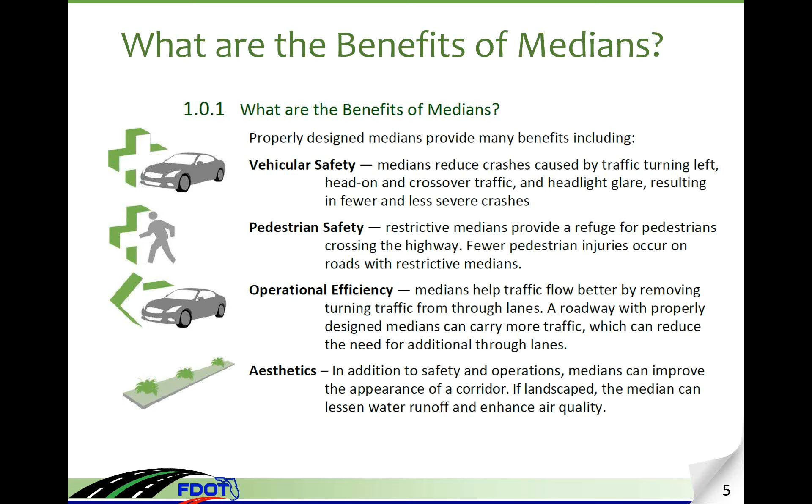This is an example of a directional median opening on US 98 in the Panhandle area of Florida. And as you can see, the long divisional island in this design can encourage movements to be made in a correct way. The term that is used in transportation engineering to describe a clear and simple direction is what we call positive guidance. And when we're designing any transportation facility, we need to use positive guidance to improve the efficiency and safety of the road.

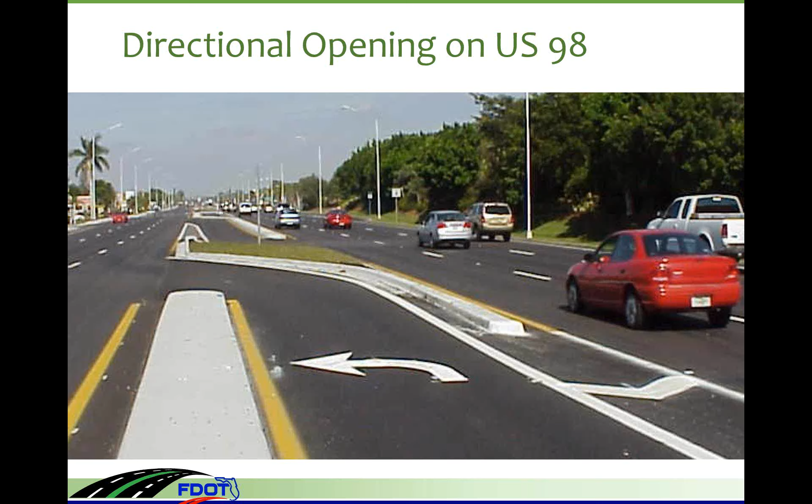And this is an example of a narrow directional median. As you can see, it's a narrow median with a 22-foot median. The narrow median itself may not be a positive guidance, but as you can see, the painted lines encourage drivers towards the correct use. But again, at times we may see illegal maneuvers, but we hope that these illegal maneuvers happen during the very low traffic.

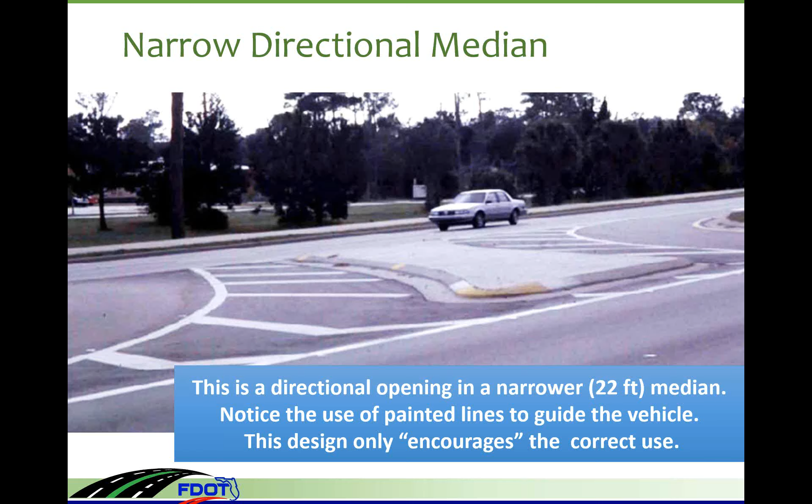Research has shown that restricted medians have a significant safety benefit. And in 1993, there was an evaluation on urban multi-lane facilities in Florida, and this research showed that the crash rates for roads with restrictive medians were 25% lower than those with two-way left turn lanes. And after 1993, there has been other research that really validates this research that was done by University of Florida, and other research has shown that restrictive medians do result in lower crash rates.

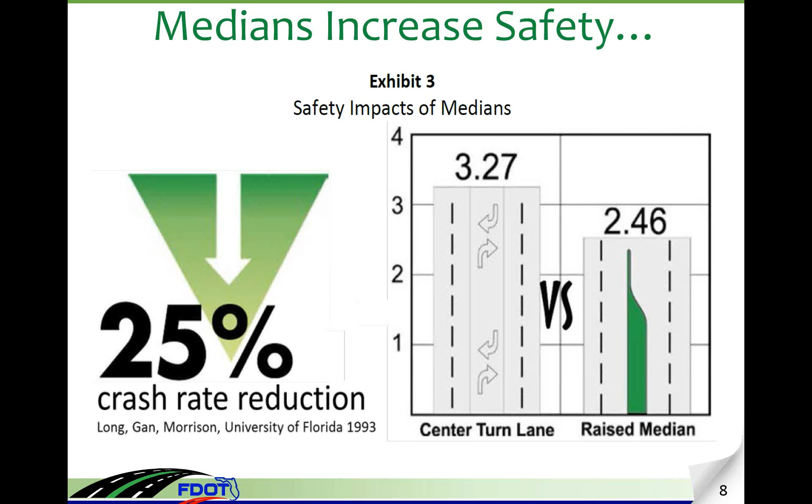So recently, the Florida Department of Transportation completed research on roadway corridors that were retrofitted with restrictive medians. One of the locations that we analyzed was Apalachee Parkway here in Tallahassee. And as you can see, a pedestrian in the middle of the road, that's not a good situation for the pedestrian. And so based on this research, the crash data shows a significant safety benefit on Apalachee Parkway after the median was constructed.

It's a little slow when I click.

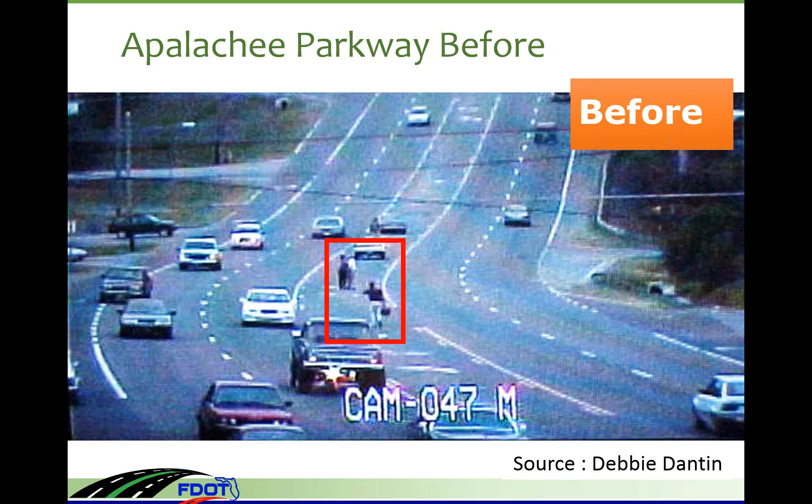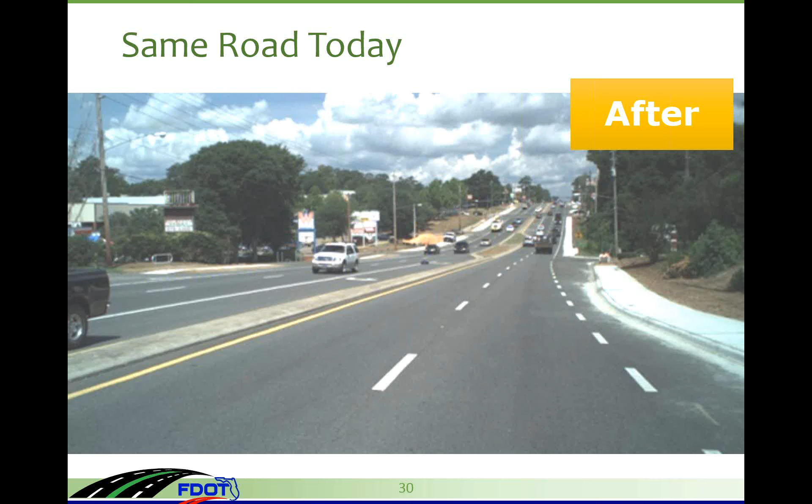And in addition to the study that we did on Apalachee Parkway, we looked at a number of other corridors, and we saw the impacts of having restrictive medians after the medians were constructed. And as you can see in this picture, before the median was constructed, we had 9 crashes. And the color of these dots, as you can see on the bottom, shows you the severity or the type of crash. So before the median was constructed, 9 crashes, and after the median was constructed, as you can see, significantly reduced the number of crashes.

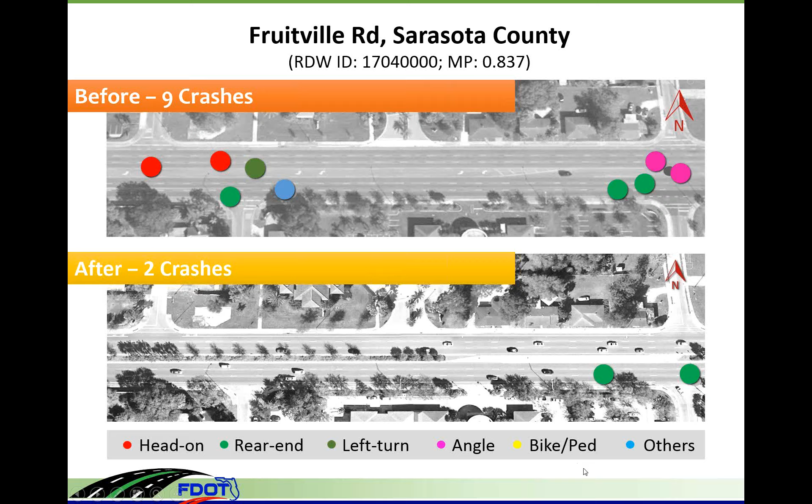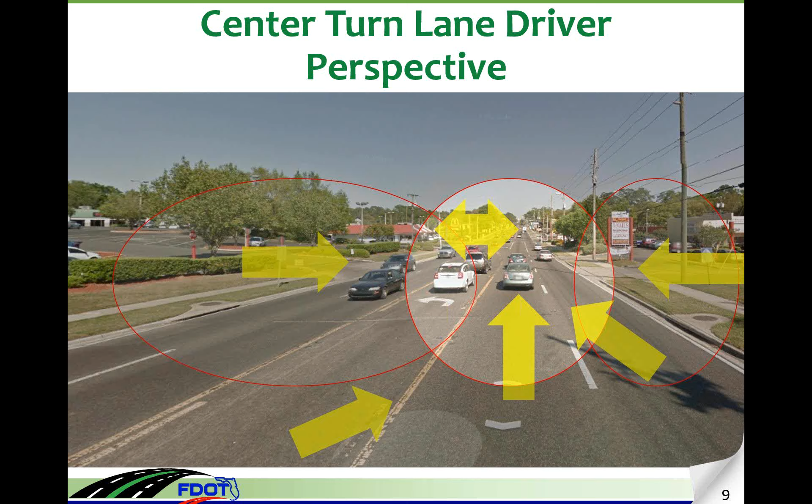As you can see, there are many areas where the driver is really overloaded with information from the surroundings. And this is why we want to minimize these information loads by really doing away with these center lanes and constructing raised medians. And this is after the median is put in, and as you can see, with the restrictive median there really aren't too many conflict areas, and the information load has been reduced significantly.

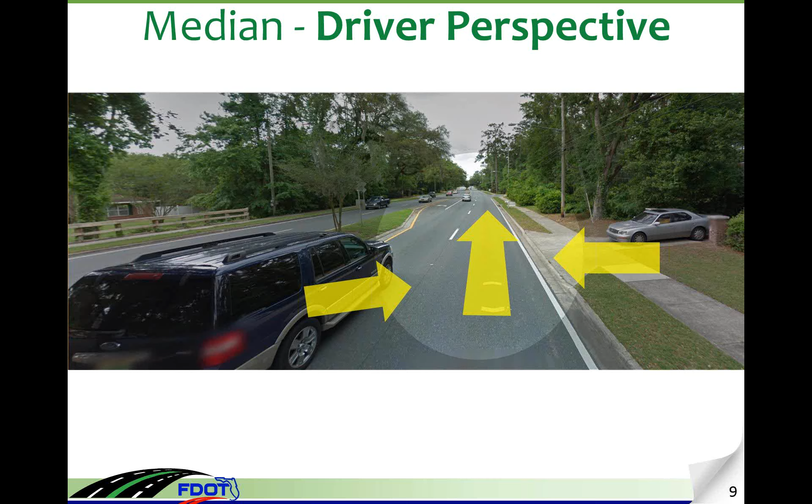One of the questions that we professionals get frequently is that we or FDOT are causing too many U-turns. And the fear is that U-turns are less safe and require the driver to put themselves in more danger by traveling a long distance. But a number of studies, including one done here at the University of South Florida, show under most urban conditions, making the right turn followed by a U-turn is much safer than making a direct left turn. And as you can see, the reduction in crash rates and also the reduction in fatality rates.

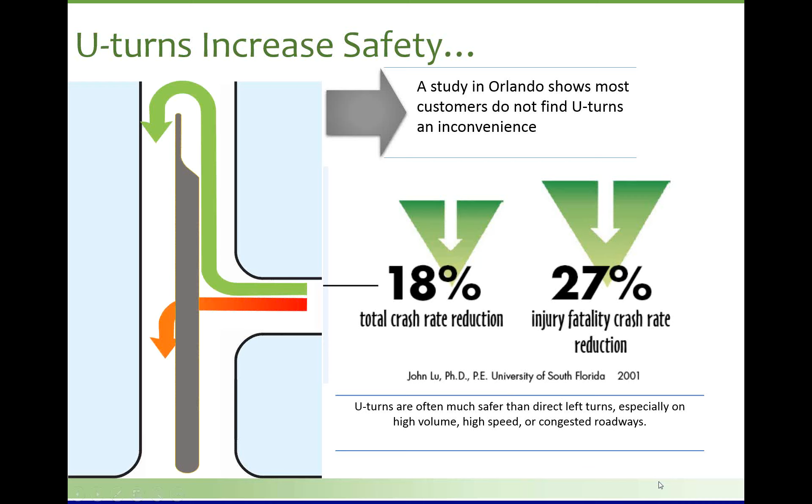I'm going to give this poll to Gary. I can do this poll. Okay. Gina, can you hear me? Yes, I can. Go ahead. Gary. Yeah. We have a poll here, and I'll be doing that poll.

Let me ask you, have you ever heard of the Highway Safety Manual? So I will be launching this and giving you an opportunity. Okay, right. So far I see some really good results here, since this is such an important tool. Okay, I'm going to close the poll right now, and then in a moment, you should be seeing the answers to this. Okay.

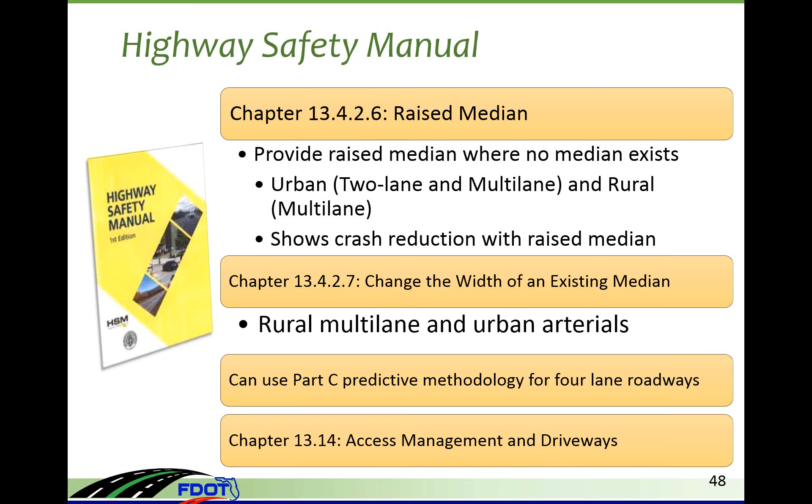So in this Highway Safety Manual, there is a chapter 13 that talks about raised medians and the width of the medians, and it shows us exactly how raised medians can reduce the number of crashes, and also the width of the median. And Part C of the HSM also has the predictive methodology. And again, in Chapter 13, Section 14, it shows us the benefits of access management and driveways.

So one of our FDOT districts used the Highway Safety Manual and applied the methodology to State Road 574, and they wanted to see the benefits of the restrictive median where the right-of-way costs were going to be close to 1.6 million over the alternative without the restrictive medians. They looked at the existing conditions: a 4-lane road about 1 mile long, ADT of 30,000, and they wanted to see the benefit of the restrictive median even though the right-of-way would cost close to 1.6 million.

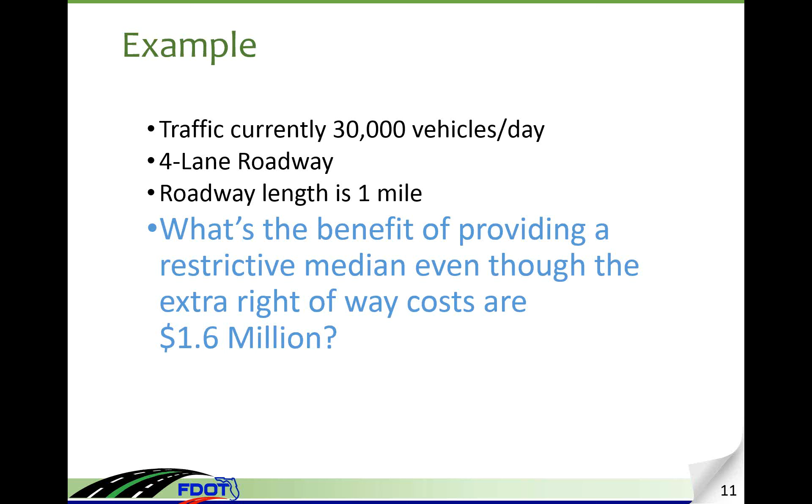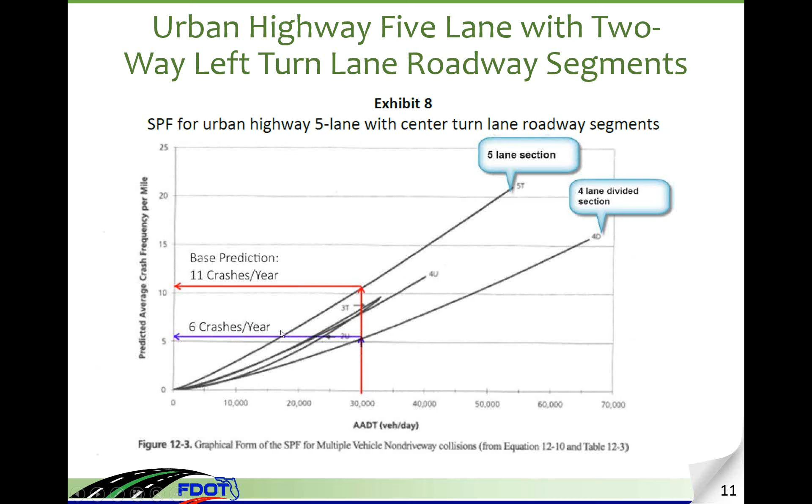So this exhibit came from the Highway Safety Manual, and it's called the Safety Performance Functions, and it shows, based on the number of lanes, 5-lane section and 4-lane section, and based on the 30,000 ADT, the 5-lane section has a higher number of crashes, 11, even just by looking at this without calculating anything. And if we look at the 4-lane with the raised median, 30,000 ADT, the number of crashes went from 11 to 6.

So in order to really justify any project, we have to do a benefit cost analysis. Without this, I don't think it can be justified. So in this example, they looked at the 4-lane crash cost, 2.2 million, and the 5-lane crash cost, 6.4 million. The difference between these two is 4.2 million. Then they also looked at the 4-lane right-of-way cost, 2.2, and the 5-lane right-of-way cost, 600,000. And the difference between these two is 1.6 million.

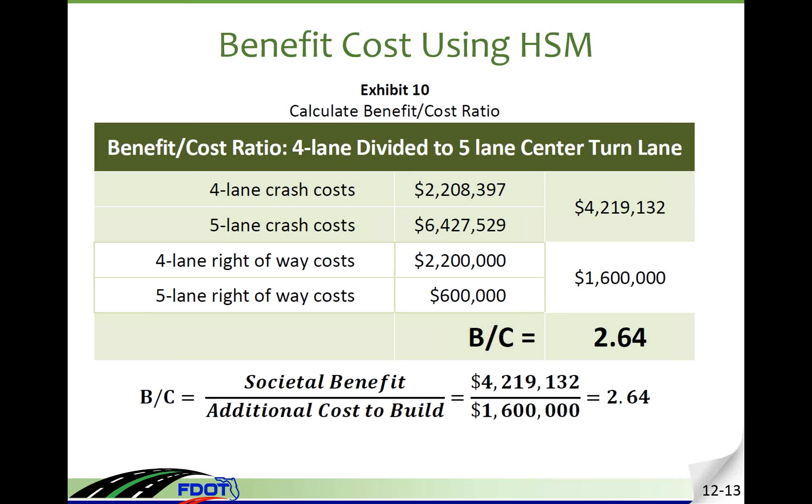So we divide the difference in crash cost by the difference in right-of-way cost, 2.64; that's the benefit cost ratio. And based on the Highway Safety Manual, the benefit cost ratio has to be over 1 in order to be justified. If you want more information on why or how this was calculated, you can go to the Highway Safety Manual, Chapter 12-13, which gives you much more information on how to calculate the benefit cost or why the benefit cost ratio is needed in order to justify an improvement.

Administrative Rule Chapter 14-97 establishes 7 access management classifications. Standards within the rule are for medians, median opening spacing, as well as driveway spacing. There are classes 1 through 7; class 1 is for freeways, but we're not showing it in this rule. Then it's from 2 to 7 for arterials, with 2 being the most strict access management class and 7 being the least strict access management class.

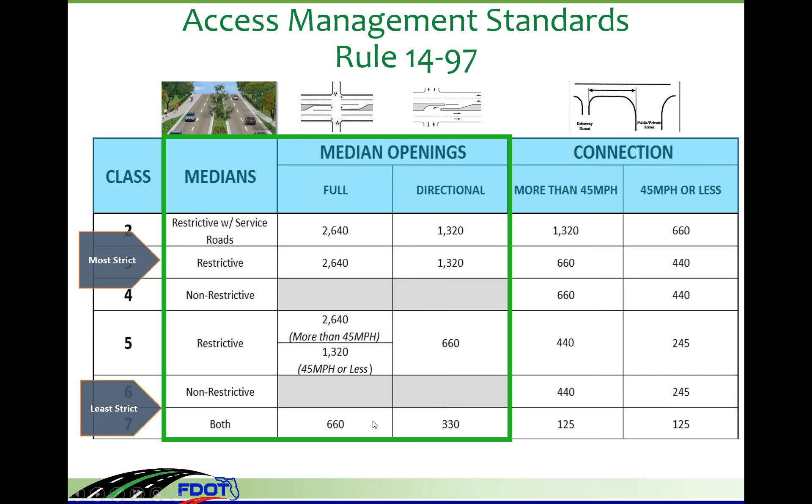And these classifications are further divided, as you can see, by speed limit: 45 miles and over, and less than 45 miles. And it gives you, based on the access management classification and median types, how far median openings, whether full or directional, have to be spaced from each other.

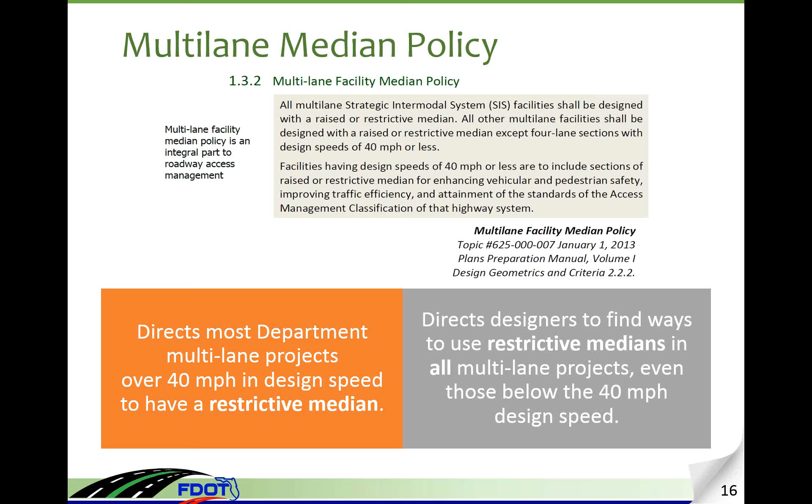And one of the most important policies ever established at Florida DOT was the multi-lane median policy, which is now part of the Plans Preparation Manual, PPM. This portion of the Plans Preparation Manual makes provision of the restrictive median on new multi-lane projects the rule rather than the exception.

So we know that the provision of a new median or the closing of an existing median opening can be very controversial, and for this reason we have a procedure that has set up an access management and median opening review team in each of our districts. These review teams have been in existence for over 10 years. Median opening decisions sometimes are just not black and white. Sometimes they can be handled at the local level.

Hey Gina, can I talk about this one? Go ahead. Yeah. The only reason I'm butting in is that I've been around long enough to know where some of the research came from, Georgia and Georgia Tech.

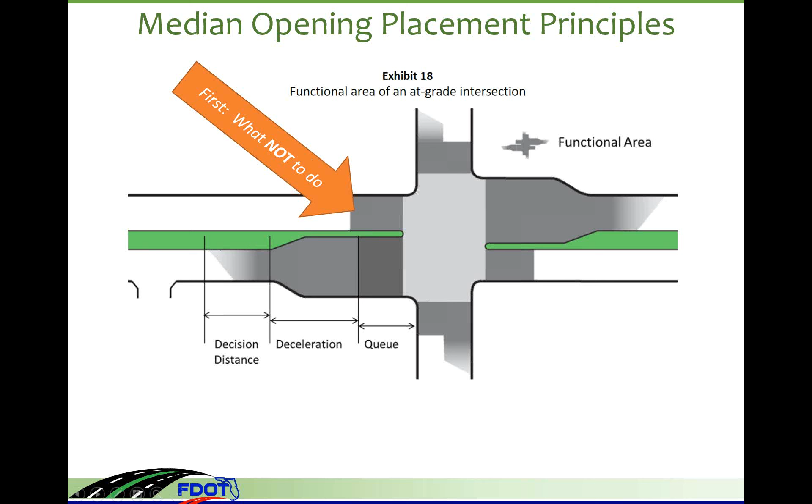Every intersection has a physical area, right here, as well as a functional area around it. This area is for the operation of either the signalized or unsignalized median opening, and this functional area should be respected. The first thing: don't put any more median openings in this area.

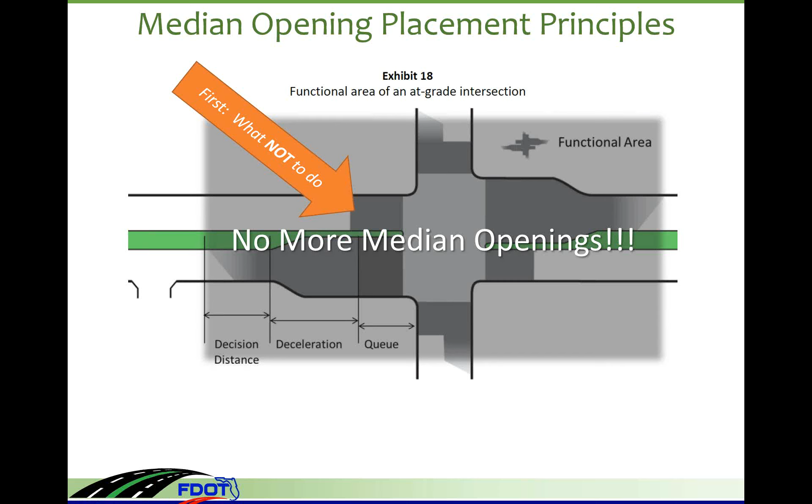You should not put median openings across left turn lanes. It's really important. It is a real confusing situation, and it is something that drivers do not expect. And I have noticed in my travels around the state that we have gotten rid of most of the ones that I knew about.

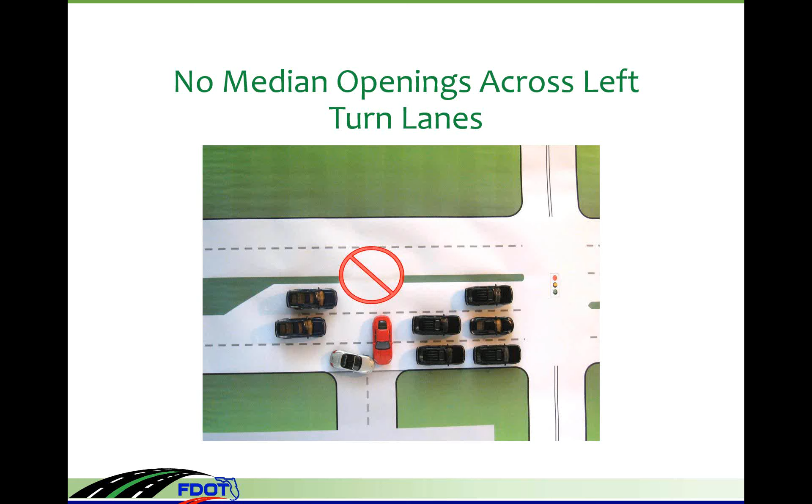Another not-do is to have a median opening within a turn lane. This design used to be more common, but we've gotten rid of most of these also.

Okay, so that's what you shouldn't do. This is an example of one that's since been corrected, where we put in a median opening through a dual left turn bay. As I said, it has been corrected. This is an old picture.

The other is to avoid median openings that cross exclusive right turn lanes. There is a problem with the Good Samaritan. As you can see, what happens here is that the left turning vehicle into a driveway located on a continuous right turn lane is let in by these Good Samaritans. Let's find those Good Samaritans. There they are. And the visibility is such that they are blindsided by the free-flowing vehicle in this long, possibly too long, exclusive right turn lane.

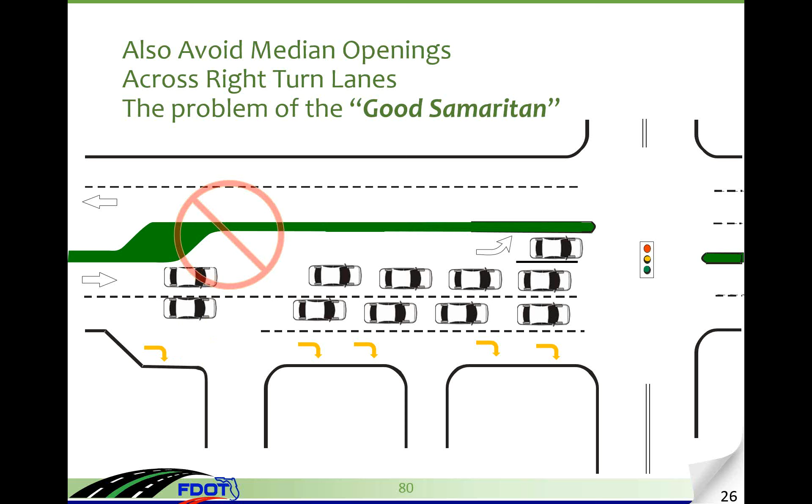I have seen a number of ways of dealing with this around the state of Florida. Sometimes they work with the actual turn lane, either shortening it or marking it in such a way for people to know that this is a special area. And along State Road 436 in the Orlando area, they have closed a number of median openings in this situation. So don't do that. Do that instead.

We've discussed a number of things not to do when placing a median opening, but we're going to get into more specific guidance right now to help you determine the appropriate location of median openings. You can probably break it down into three criteria that should be looked at in making median opening location decisions, and they're very similar to the decisions you need to make for an intersection.

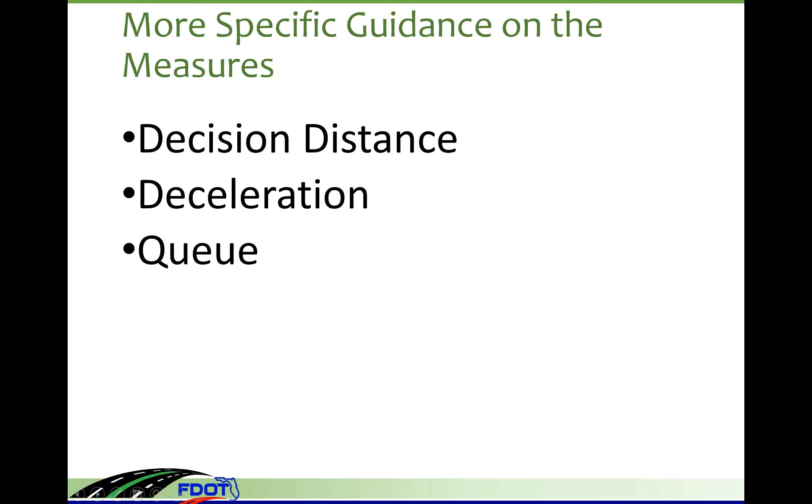We're going to approach this as a driver who is approaching an intersection. Okay. First, you need space and time for the driver to figure out what they're going to do. Are they going to stop? Are they going to get into a turn lane? Or are they going to go straight?

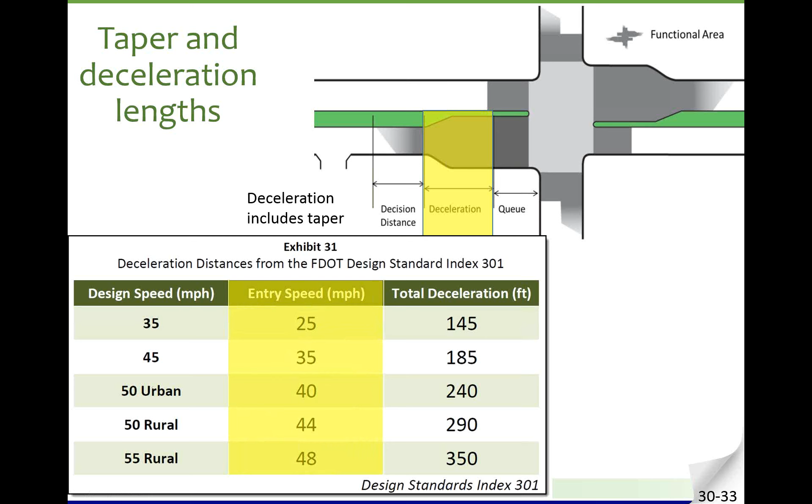Okay, so the entry speeds are actually an important feature that you should be aware of in the standard index. The reason entry speeds are important is because of something called speed differential, or difference between speeds, to make it more plain English.

In the situation that we try to design for in Florida, if you're designing for 45 miles an hour, you would expect that left turn driver to enter the turn lane at 35 miles an hour. 45 minus 35 equals 10. This is a 10 mile an hour speed differential, and it's usually considered safe by the profession.

Now, what happens is if you've designed it for a certain queue, and we'll discuss queue in a few moments, and there are more cars than you expected, you're in this situation where you're going 45 miles an hour, and you go, oh God, there's not much space left, and I now have to slow down to 15 miles an hour to get in here. Or even worse, you're slowing down to 15 and then stopping, and you're not even in the turn lane. In this case, this is a 30 mile per hour speed differential, 45 minus 15.

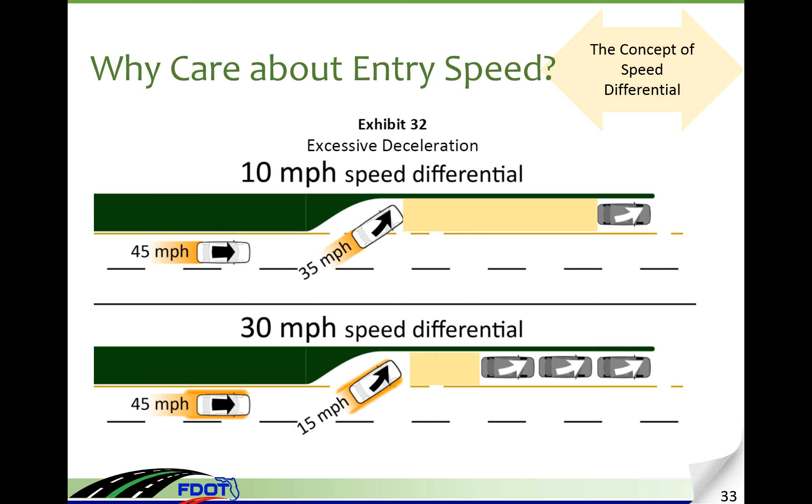Okay, so that's all based on the fact that you got different realistic, or different practical, deceleration distances. And that is why the queue is so important.

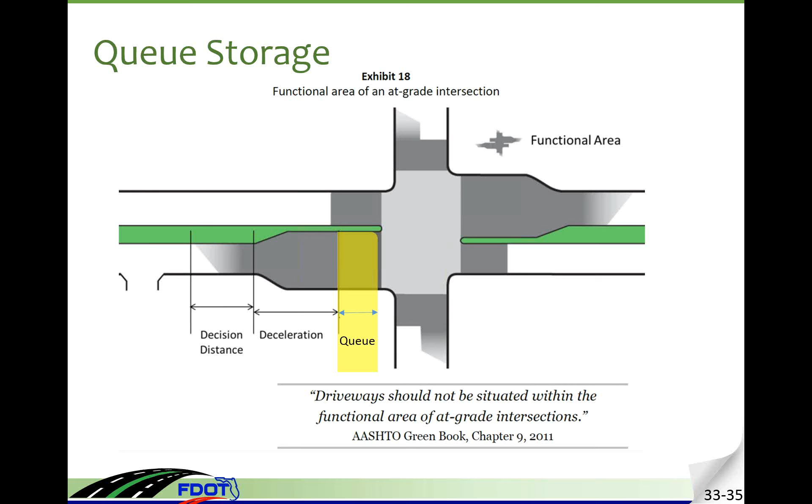But unfortunately, the queue is highly variable, and it's kind of guesswork in some ways. The necessity to store vehicles and trying to get that right is important for the operations of the intersection.

The basic building block of queue length is the typical passenger vehicle. This is a standard passenger vehicle. The space needed for a car in a queue is around 25 feet, which is made up of the 19 feet of the typical vehicle, with 3 feet on either side, or 6 feet being the buffer.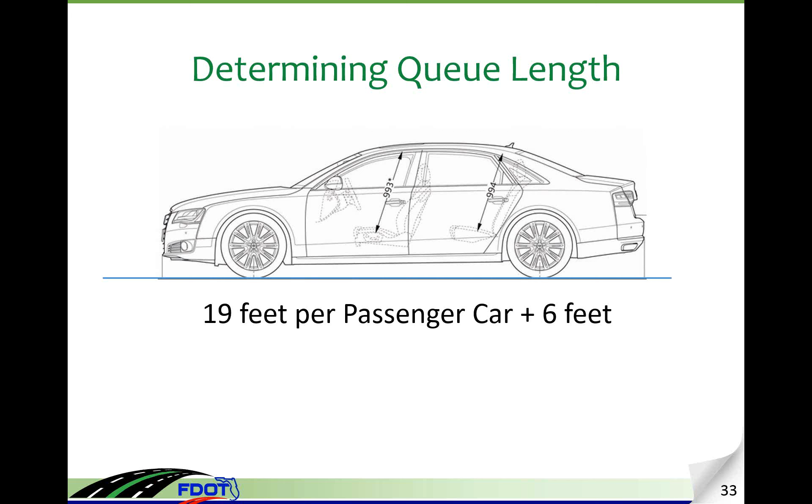Now, how do you figure out queues? Well, the best way, we say, is through a study. But knowing, again, studies are variable. They're based on assumptions of the future that could change.

Queue lengths tend to vary during the same day, the same hour, and a lot of times they just seem random.

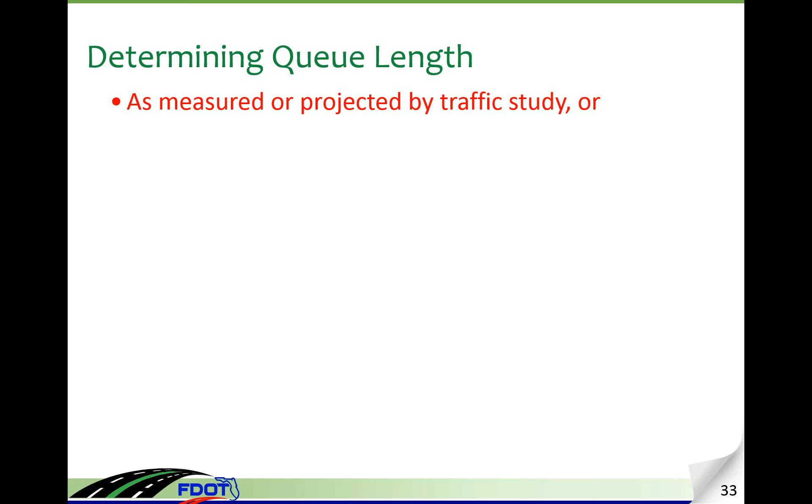If there is an urban area at a typical unsignalized median opening, there should be a minimum of 100 feet or 4 vehicles. Remember that we said we're using 25 feet as the typical vehicle length. In rural areas or other areas where you expect low volumes or very low volumes, you can use a 50-foot or 2-vehicle queue. Also remember that when you're in a rural area, it doesn't mean it's necessarily going to be low traffic. We don't know in the future what's going to happen. If at all possible, try to be generous with the design of queue storage.

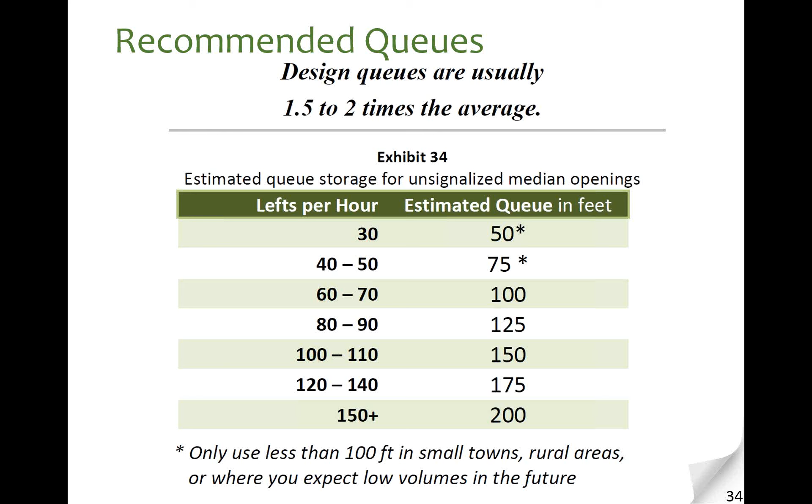Based on random arrivals at the unsignalized median openings, we have used a formula to come up with an estimate that takes the left turns per hour expected, and provided this table as a simplified method for determining the queue length. This is all based on the 25 feet. There is further guidance in the handbook for over 10% trucks; this is for up to 10% truck vehicles.

We spent very little time on the official spacing of median openings as shown in the access management standards, and there's a reason. We didn't want our professionals to have to just always answer questions from the public by saying, well, that doesn't meet the standards. We really want our professionals to know where these standards came from and why they're important.

So it's one of the major reasons we put out the median handbook. We feel that the numbers in the standards are a good guide. They give you good flexibility, but you really do need to be thinking about deceleration, queue storage, and the turning radii. I'll show you how this fits together.

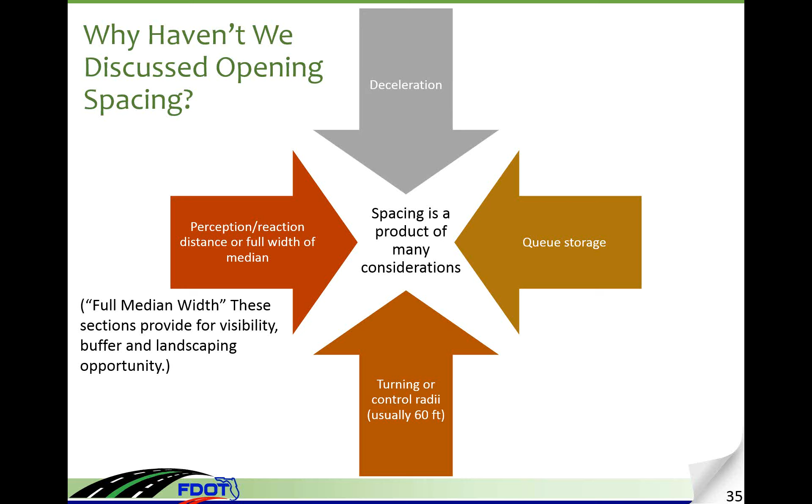Let's take a look at this very tight urban example, two intersections. In this instance there is a full median opening at both directions, we'll call it east and west, and they share a 50-foot taper. There is no portion of this median that is truly, let's say, 22 feet wide. I always like to use 45 miles an hour as my test case; this makes me not have to memorize many things.

185 feet is the deceleration for 45 miles an hour, and in this case, because we don't have any full median width, they're sharing this 50 feet right there. We've given 100 feet on both ends as a minimum, and we're adding 60 feet of turning radius. If you went from beginning to end, this would be your median opening spacing. This is the way we would like people to think about median opening spacing, not just some standard out of a rule book. We want people to think about this using traffic engineering principles. So this is 640 feet here.

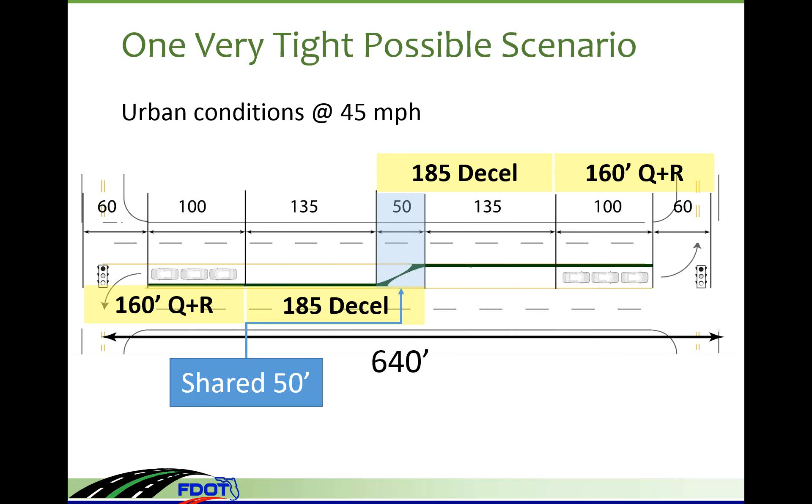That is pretty tight. As a person my age remembers, when we used to build multi-lane roads, we would build openings every 660 feet. So it's one of the reasons we came up with that.

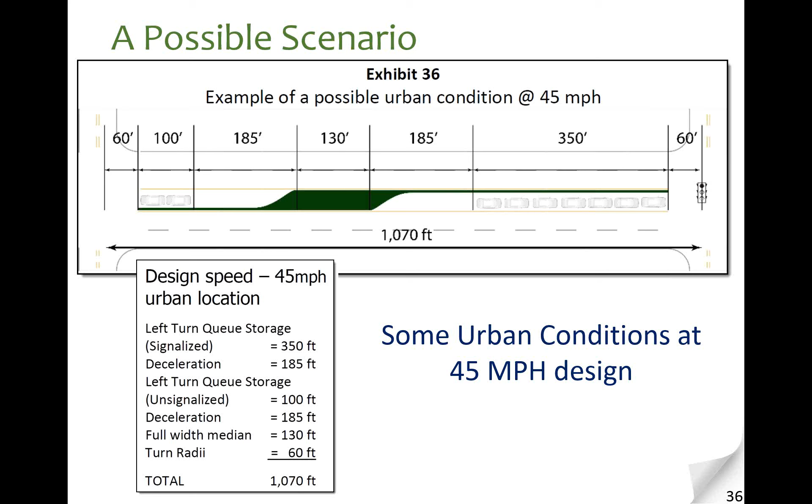This is, I guess, a more realistic, non-standard example that shows some distance here. Working our way from the inside out: about 130 feet of full median width to allow for better visibility, 185 feet of deceleration, and for the signalized intersection here, 350 feet of queue storage, which is not uncommon for a high-use left turn lane under new construction. This intersection is not signalized, so we're using the minimum of 100 feet here and 185 feet for deceleration also. If you added all these numbers together, it's a bit over 1,000 feet. Again, even 660 feet, which used to be something we'd cookie-cutter up, doesn't meet that.

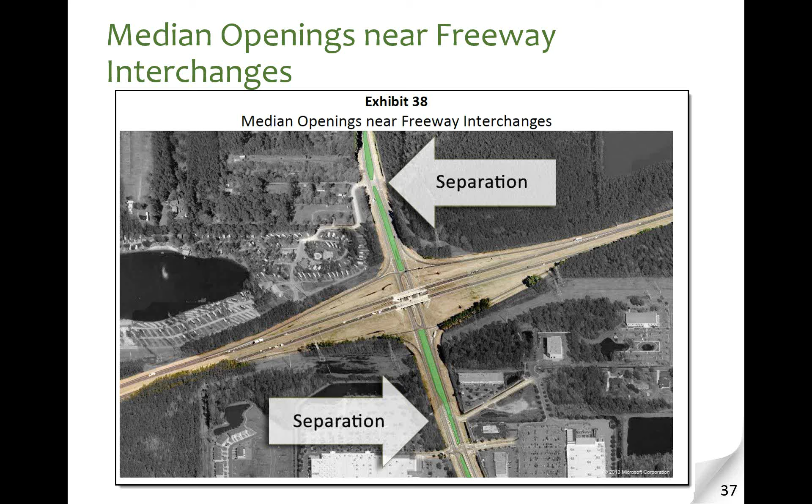Median openings near freeway interchanges are extremely important, and we should be well aware of this when we improve freeways and when we allow development along these areas close to freeways on the at-grade arterials. It's critical that median openings be given significant separation from the on and off ramps of the freeway interchange.

This is an example I know fairly well because I used to live on Lee Road off of I-4 in the Orlando area, and it is an intersection that is failing frequently. Notice that our directional median opening spacing for Lee Road would be 1,320 feet, and what we have here is only 220 feet. This is a signalized intersection. Notice a driveway only 40 feet from the off-ramp of I-4. For this reason, heavy congestion and backups are common throughout the day here.

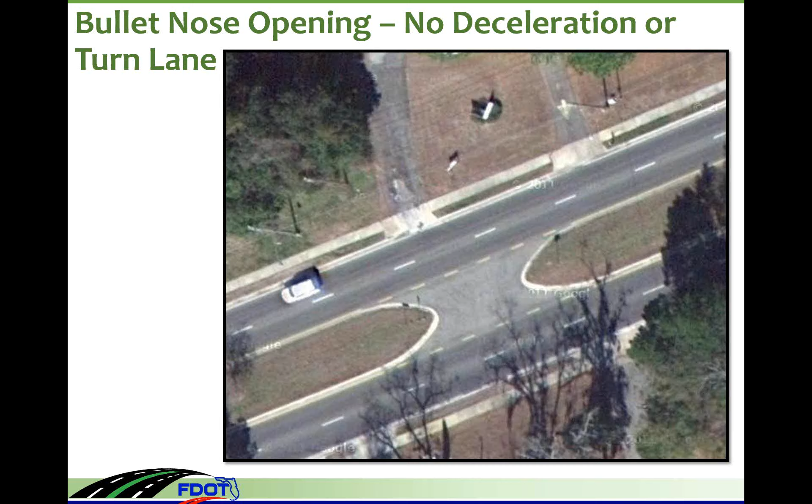This is a typical example of what used to be a rural 4-lane roadway, which is now quite urbanized, which happens to a lot of what was once rural multi-lane. You'll see that there are some turn lanes, built probably as part of the permitting process for the businesses alongside. In the center of the roadway, right here, you will see that there is still a bullet nose in existence, though I believe it's changed because of development. The reason this should be avoided is seen by how many vehicles you see on this road. Look how closely people are following.

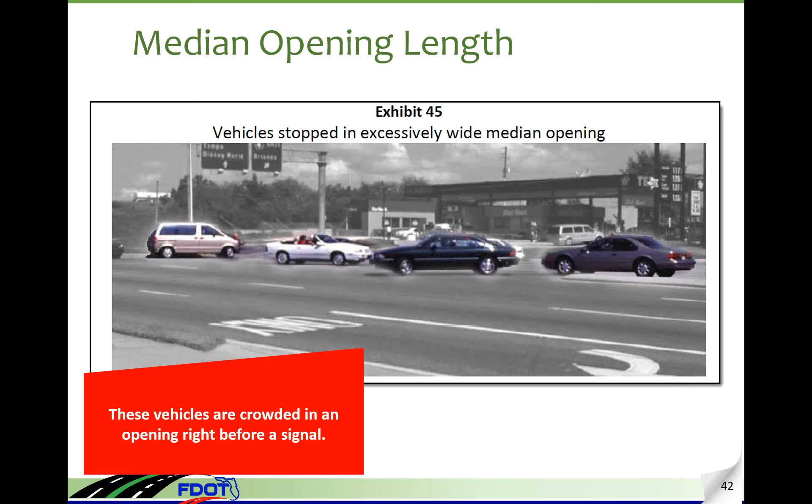They really need more space for people to slow down and get into an exclusive turn lane in order not to cause rear-end collisions. Another important feature is the length of median openings. Sometimes they allow way too many cars to get in there. You can see here that vehicles are stacked in this opening, and the driving task is made even more difficult by the fact that some vehicles are blocking the vision of others.

At this point, I would also like to stop for questions and ask Andrew or anybody else who has been handling questions.

I'm not seeing any questions, Gary. Okay. This is obviously the advanced class, and I'm looking at the names. A number of these people I know have been active in previous versions of the median handbook. Okay.

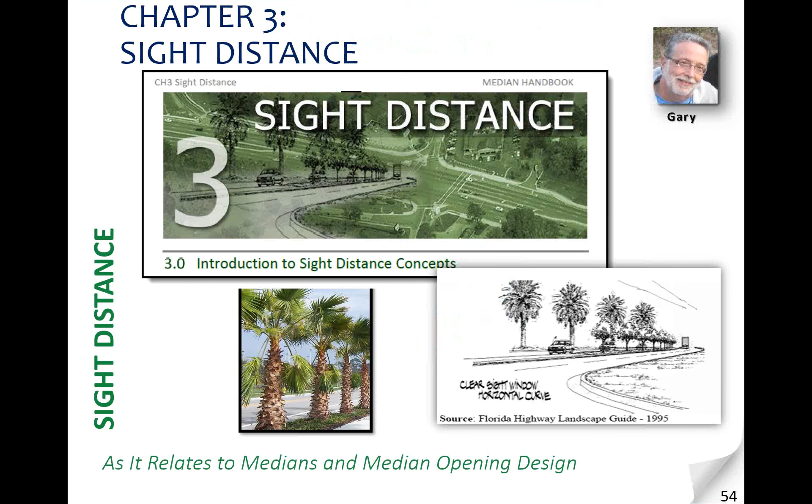Then I'll move on to sight distance here. It's an important consideration in the placement of median openings. The most important type of sight distance used is called intersection sight distance, and that's the sight distance for vehicles to be able to make intelligent decisions to maneuver with the typical P vehicle.

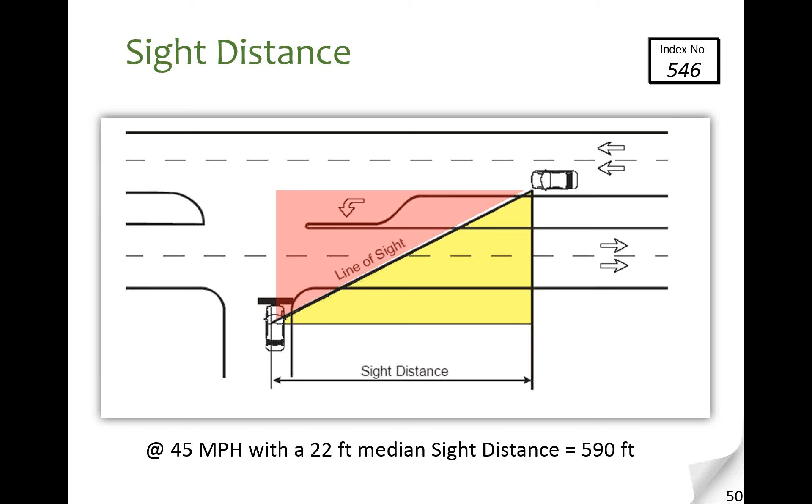This shows the required sight distance for a 22-foot wide median with a design speed of 45 miles an hour. This is in the standard index, and it calls for 590 feet in this situation. You can see there are different situations. This is a more realistic view from an aerial standpoint.

However, I do need to point out that this car here really needs to be further back to the stop line, and that was just some problem with the animation as we switched to a different format.

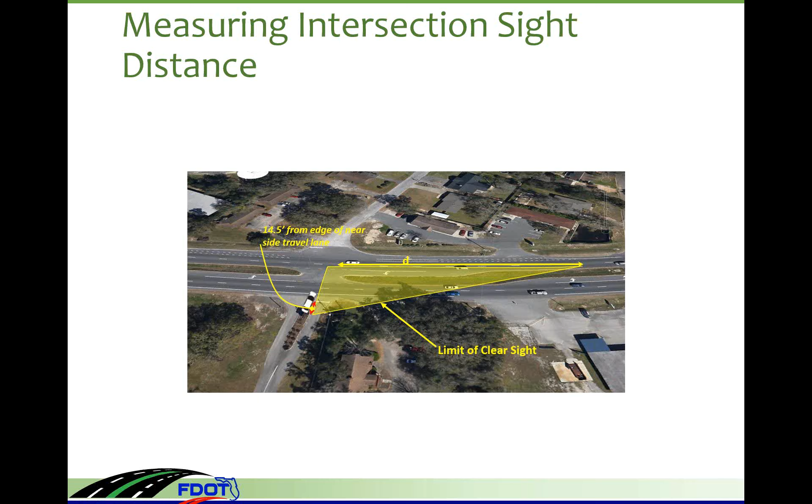This is just an example of the standard index containing many required distances for different situations, such as different design speeds, median types, and vehicle types. This slide only shows the standards for the typical passenger vehicle, also known as the P vehicle, with the 22-foot median. This is probably the most common in the urbanized area of Florida.

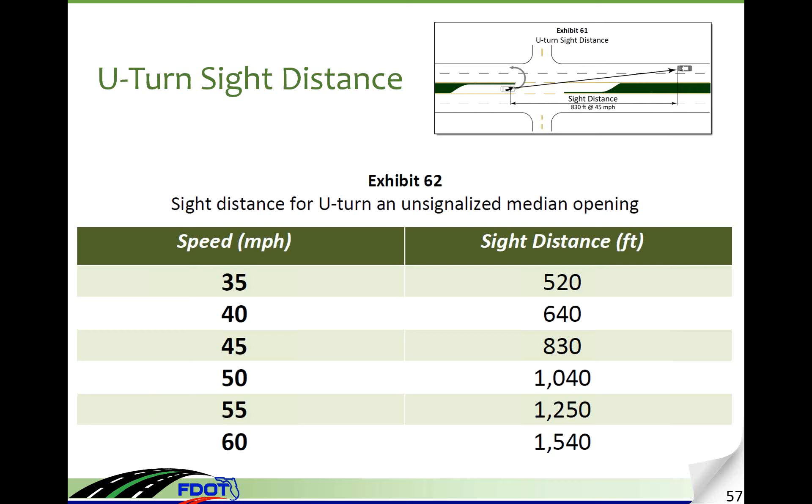One special feature in this handbook is a U-turn sight distance. We might be the only state that has ever done this sort of work. There is no known national guidance on this, and people from all over the country have asked us to see this. We used the typical AASHTO standards that were around in 1996, which makes them a little bit more conservative than what they would be today if we recalculated.

Another important feature to consider in terms of sight distance is the offset of the median opening. Here on the left, you'll see negative offset, which in this case prevents drivers from seeing oncoming traffic in the through lanes. Now, positive offset, which does require more design and right-of-way, gives you a clear view of the cars approaching you. The use of a positive offset is a very good design feature.

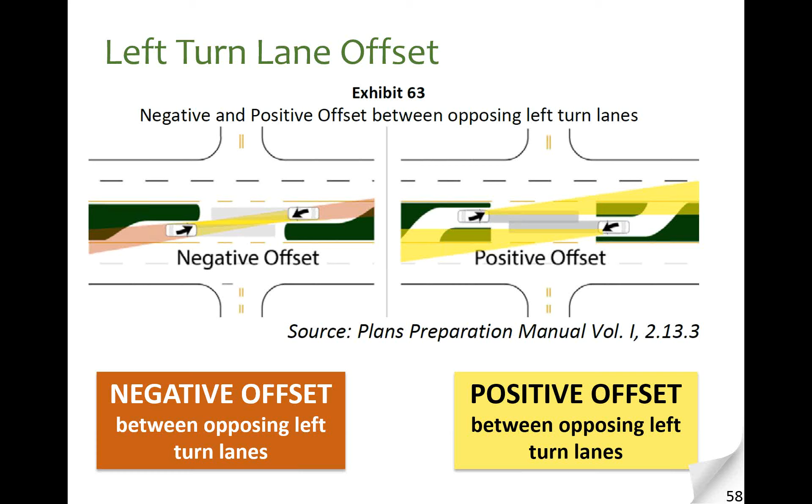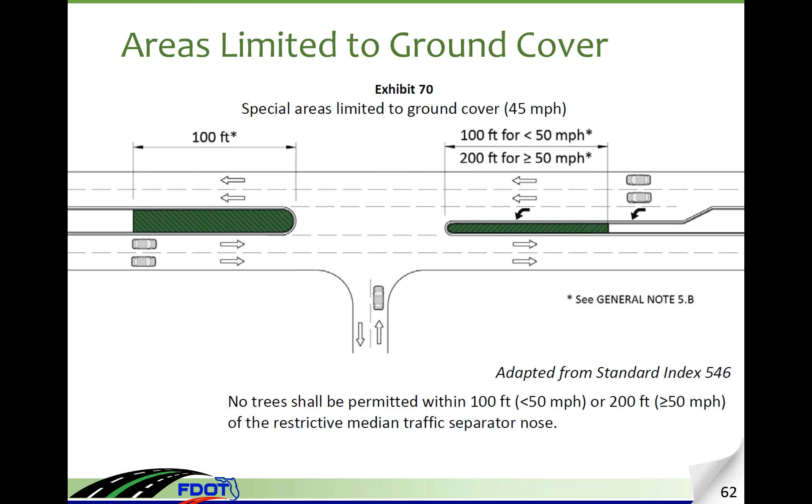Landscaping has been a major factor in the development of sight distance standards here in Florida. Here you will see something from the standard index that shows that somewhere between 100 and 200 feet from the nose of a median opening, depending on conditions, there should only be ground cover that will not block vision.

But going further, Florida DOT, and I think again we're the only state that I know of that has done this, has standards for the spacing of trees on our medians. Please note that there are two sets of standards here, one for up to 11 inches in diameter, the other from over 11 inches up to 18 inches in diameter. There is a reason for this: Florida's state tree, the sabal palm, fits into that category.

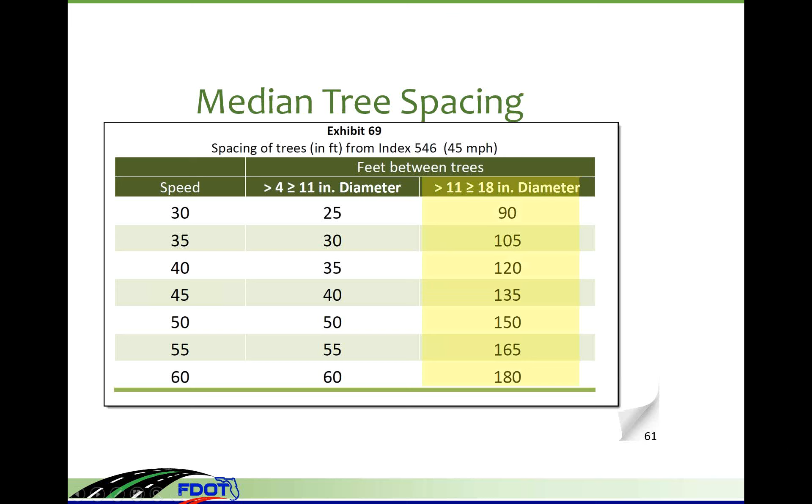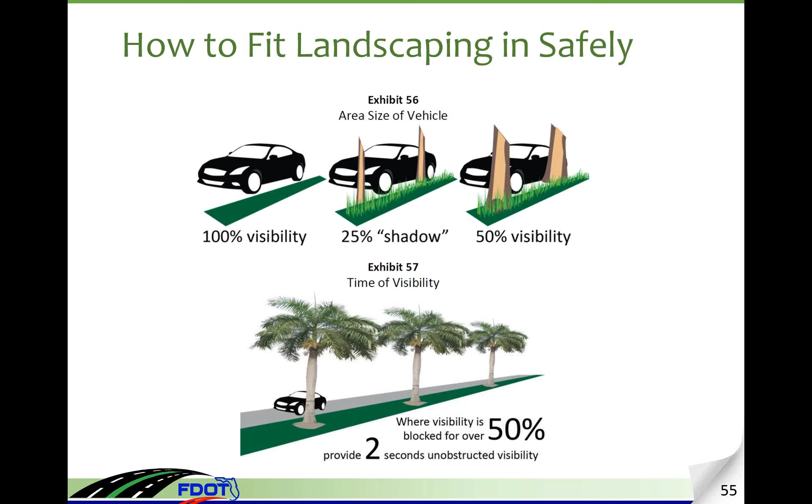So the problem with the sabal palm was that it grows bigger, and many places would not allow it since it would go against some principles of sight distance, which say you should never get below 50% visibility of an oncoming car. So a decision was made here in Florida that if visibility would be blocked over 50%, we would need to provide 2 seconds of unobstructed visibility. This puts it all together, and this is an example of the tree spacing you'd need to have. Under 45 miles per hour, you need 360 feet of stopping sight distance, which is what you'd want to keep clear of trees.

But the spacing, if it was a crepe myrtle, would be 40 feet. However, if you were trying to use a sabal palm, you would need to have 135 feet. This is a big difference, and now you know why — this provides the 2 seconds. Okay, questions? Any questions? All right, I'll move on.

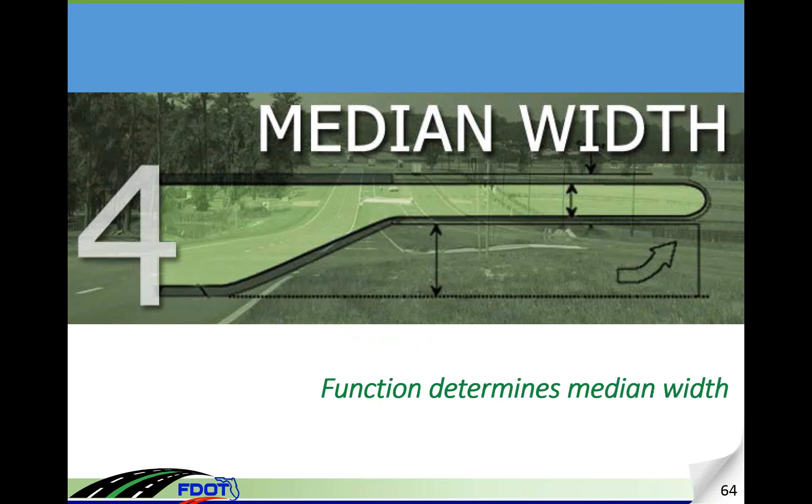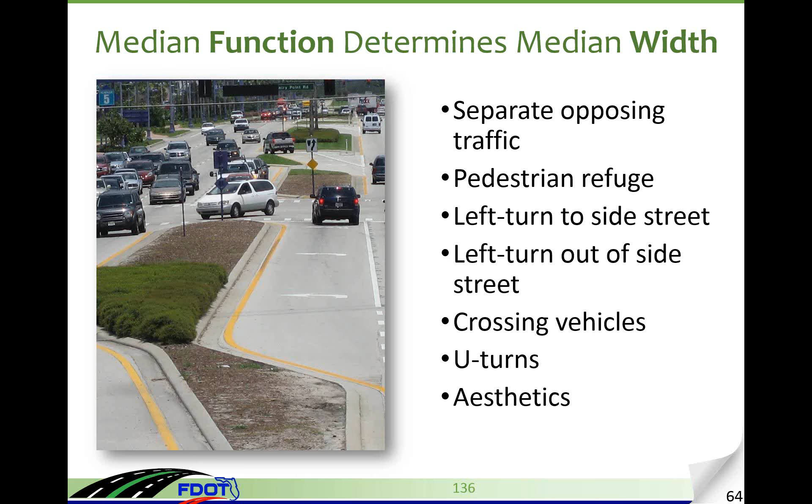Let's talk about median width. The most important principle we want to go over today regarding median width is that it is the function of the median that will determine its width. Medians do many things: they can simply separate traffic, they can be designed to help people get across the street, and more importantly these days, to provide a good place for U-turns. So we're going to talk about that a little bit.

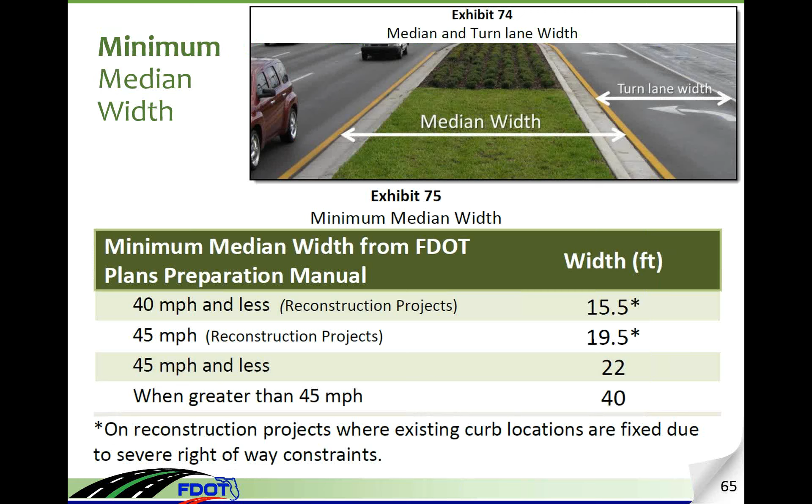The Plans Preparation Manual contains these minimums for reconstruction projects that are low speed to those greater than 45 miles per hour. We use the AASHTO Green Book templates to come up with these recommended median widths. For 4-lane highways, 30 feet would be enough for a typical passenger vehicle to make a comfortable U-turn without infringing on the side. You'll notice that for 6-lane highways, the medians can even be more narrow, because the 6-lane roadway, with 3 lanes in one direction, gives much greater space for the typical passenger vehicle to make the U-turn.

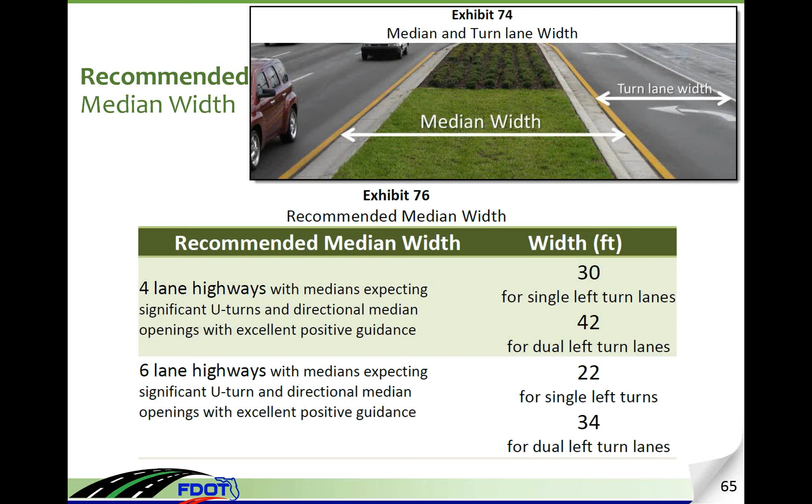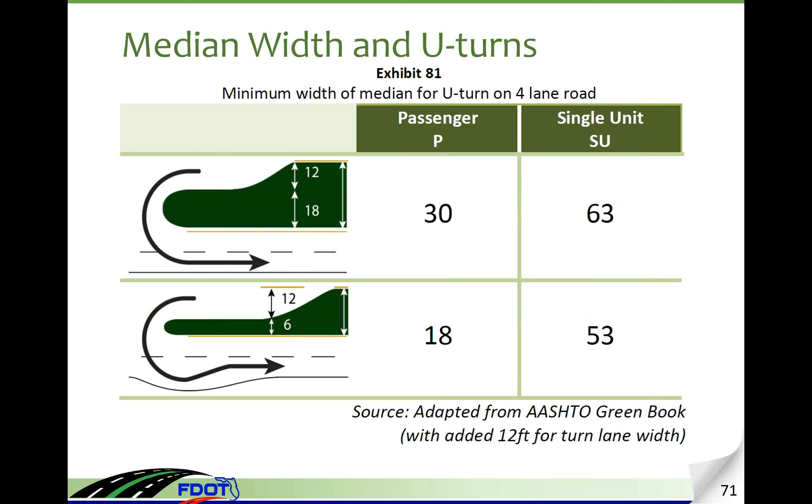That leads us to the U-turns. We know we're doing the right job when we've created more U-turns, but you do have to consider them. We touched on the median width. This shows you visually where we came up with those numbers. And what we do is we put in what's necessary, and we've used the AASHTO turning templates.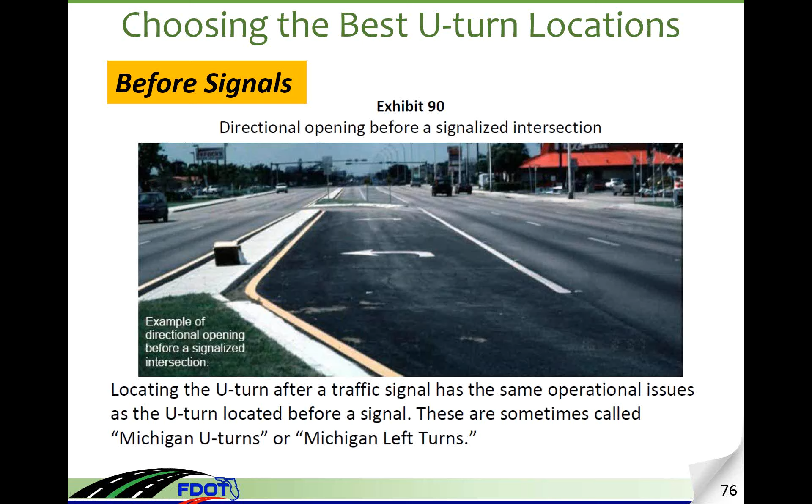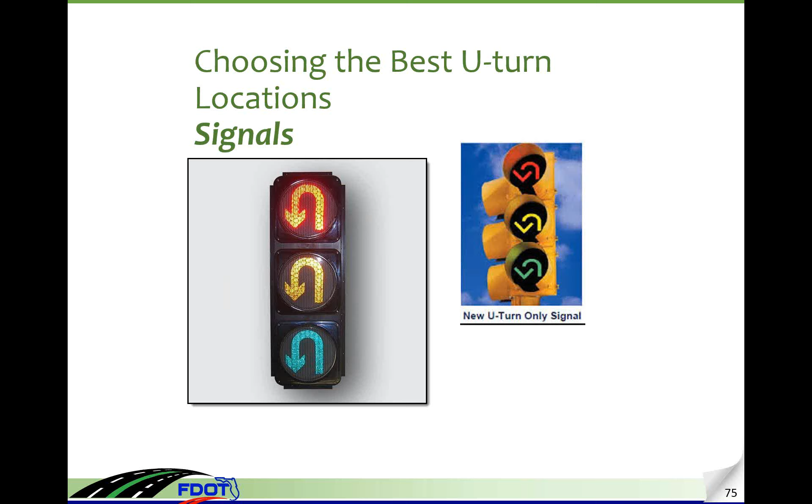It was news to me, but there seem to now be turn signals for U-turns only for places where they're designed. This was news to me, but I got to say, it wasn't that long ago for me to see my first roundabout, so I'm always learning things. With this, I will turn it over to Gina.

Thank you, Gary. Okay, hold on, Gina. Wait a second. I hope you have the controls. Okay, we'll try it. Yeah. Yes, it says you do. All right. Thank you, Gary. All right.

All of us have the new release of the Median Handbook, and we all know now Chapter 6 in the Median Handbook. It's about roundabouts, and it's a new chapter in this Median Handbook. So with this chapter, we wanted to provide some guidance to help us determine whether a roundabout is an appropriate access management tool for a specific application. And also we wanted this guidance to tell us how to best place these median openings and driveways near the roundabouts.

We haven't had guidance when it comes to roundabouts. We didn't have any guidance where to place the median openings or where to place the driveways, but we do have guidance when it comes to intersections. We do have rules, we do have guidance. We know, by following the guidance in the vicinity of intersections, where to put the median openings or the driveways. So we added this chapter to give us at least some guidance to better understand placement of these median openings or driveways.

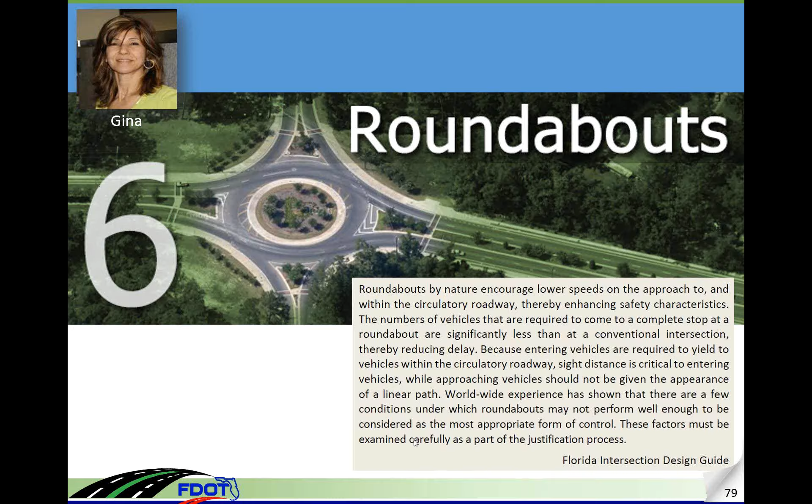Roundabouts are ideal for providing U-turn opportunities, especially if the roundabouts are designed in series, which can really help create an integrated system of moving traffic safely and efficiently. And also roundabouts have shown, based on the research that has been done around the country, that crashes have been reduced by 78% on serious injuries and fatalities.

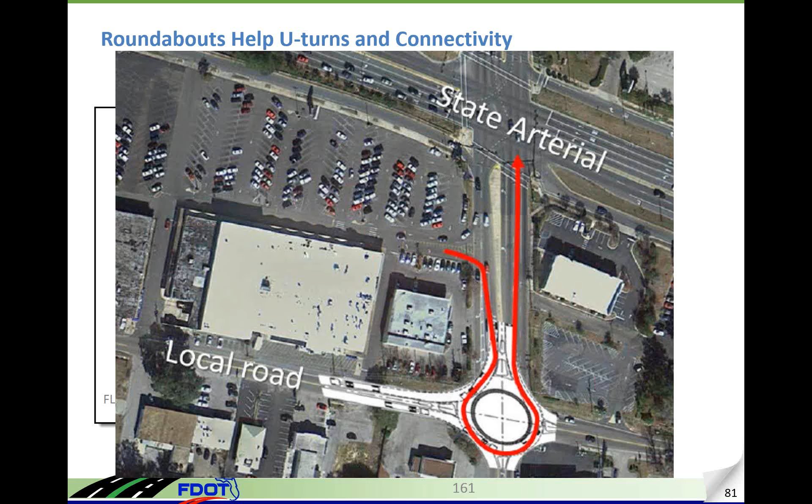Well, this is a location in Tallahassee. The local road, if some of you are familiar with Tallahassee, is Lafayette, and the state arterial is Apalachee Parkway. This roundabout is just a possible solution. It's not in place. Right now there is a signalized intersection, but again, as a possible solution, a roundabout could be one solution to redistribute traffic from the major commercial back to the state highway system.

So just earlier this year, Florida DOT completed a research project about roundabouts and access management. And as I said earlier, we do have guidance when it comes to intersections and the distances from median openings and driveways to the intersections, but we had no guidance when it came to roundabouts and access management.

So what we did with this study, the focus of this study was not on the benefits of roundabouts, nor a design guide. We wanted just to evaluate roundabouts and to understand how to better apply access management when it comes to driveways and median openings in the vicinity of roundabouts.

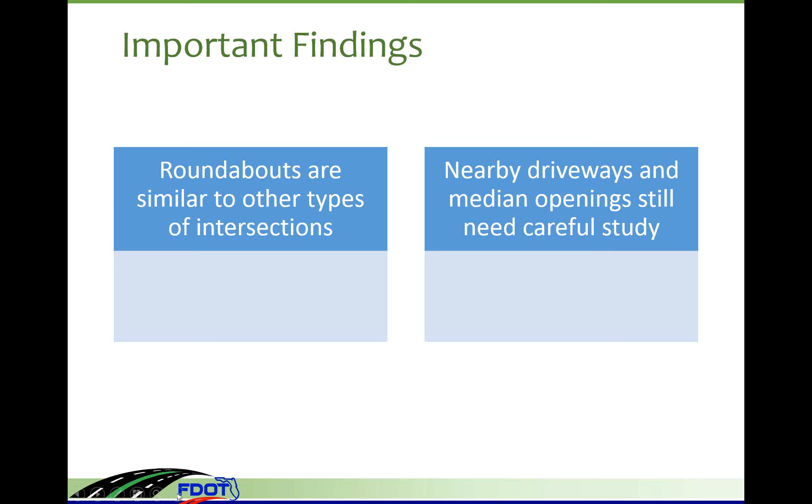Did I go too far? I think I... Gina, no, it seems that you should not touch your keyboard or mouse right now. For some reason, when you do that, it goes under your control.

That's okay, Gary. Anyways, so we looked at the functional area of the roundabouts. Again, we did not have any guidance, any tool to help us know where the functional area of a roundabout is. That's why we had a need to do research. This is just the beginning of roundabouts. Really, all of us are very new to roundabouts, and we're hoping that we would learn more on roundabouts in the future, based on our experience, as we do more research.

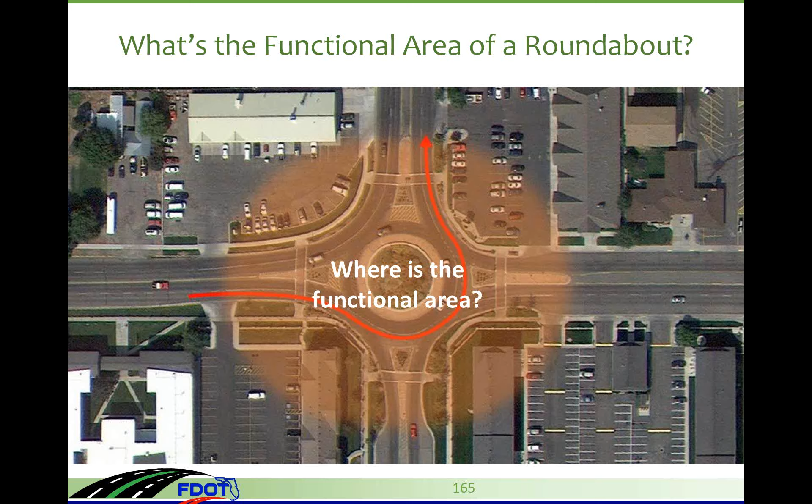But again, the findings of this research were that roundabouts really function just like unsignalized intersections, or maybe an all-way stop control. So whether it's a roundabout or intersection, we really have to know where we're placing these median openings or driveways. In this case, in the vicinity of roundabouts, as you can see, there is this median opening to this development that can cause a problem with the through movement vehicle. When it comes to roundabouts, we really have to study the area, and we need to make sure that these openings or driveways are not too close to the roundabout.

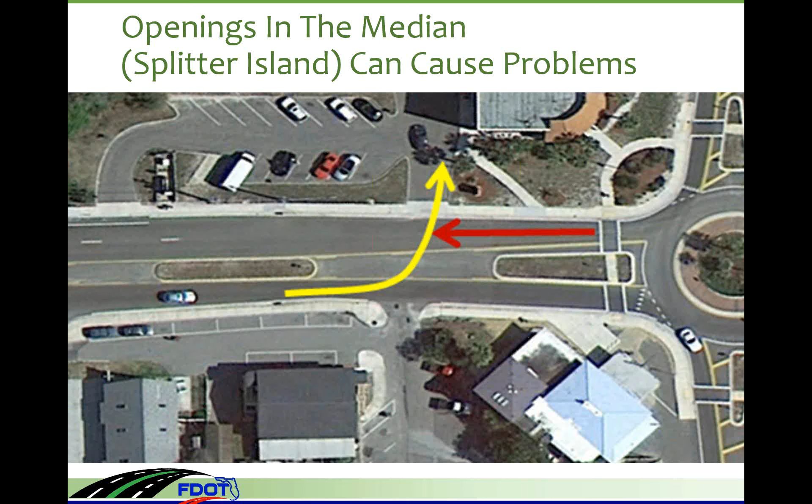So hopefully, based on our experience, once we start working more with roundabouts, and roundabouts are really beginning to increase in Florida, we learn more about roundabouts. So that concludes my section, and I'm going to turn it over to Andrew Young. Andrew, go ahead. Hi, thank you, Gina.

Before we move into pedestrian considerations, we do have a question from Bob Kasoy. His question is, do we allow tangent roundabouts? He says that they have an applicant who is proposing one. Gina, are you familiar with his question? I'm not familiar with this question, and again, our research project was to know where the functional area of roundabouts is, and we wanted to just provide the guidance on where to place these median openings and driveways, and that's what we did. The intent of this research was not how to design roundabouts.

We can unmute him if we need more clarification. Sure, please go ahead. Bob, you've been unmuted. Can you hear me? Yes, Bob, we can hear you. Yeah, the applicant was unable to obtain right-of-way on one side of the roundabout, so they opted to propose a tangent roundabout, which to me sort of defeats the purpose of a roundabout. Bob, I agree with you. Is this a permitting situation? It will be or could be, but we have not ruled on it yet. So you will have your traffic operations engineers look at this. Absolutely. It may already be on its way further than that. Yeah.

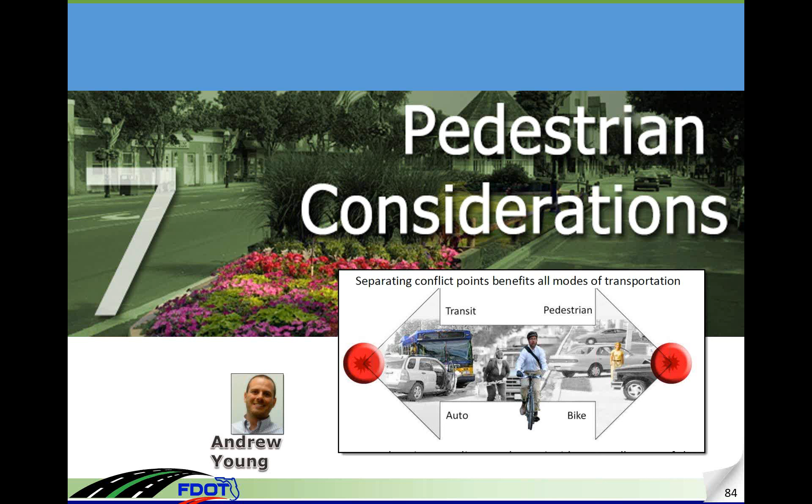Although medians have significant benefit for vehicle operations, they are also beneficial for pedestrians. Pedestrians are permitted to travel along all non-limited access facilities. Therefore, considerations for pedestrian safety and mobility should be included in median design decisions.

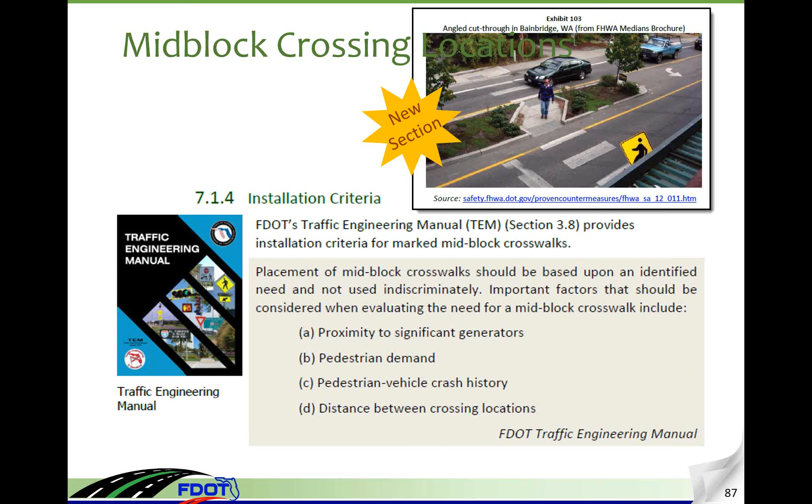FDOT's Traffic Engineering Manual has much guidance on the provision of mid-block crossings for pedestrians. This is another area that is going through much design change. This is a picture of a pedestrian refuge island with signs and special pavement markings. Pedestrian refuge islands are a proven safety measure.

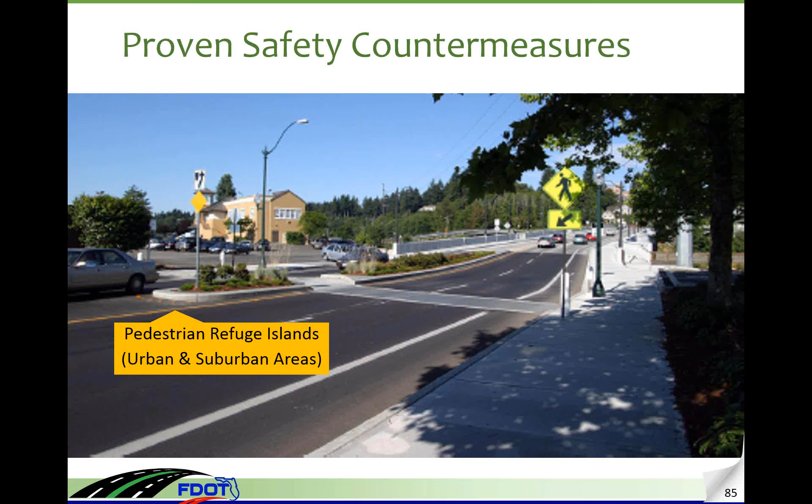By providing raised medians or pedestrian refuge areas at marked crosswalks, it has demonstrated a 46% reduction in pedestrian crashes. Even at unmarked crosswalk locations, medians have demonstrated a 39% reduction in pedestrian crashes.

FDOT's Traffic Engineering Manual provides installation criteria for marked mid-block crosswalks. These are the most important factors to consider. Is the proposed location near important generators of pedestrians such as schools and recreational areas? Is there currently a lot of pedestrian crossing demand? What is the crash history near this location? How far is it to other appropriate pedestrian crossings?

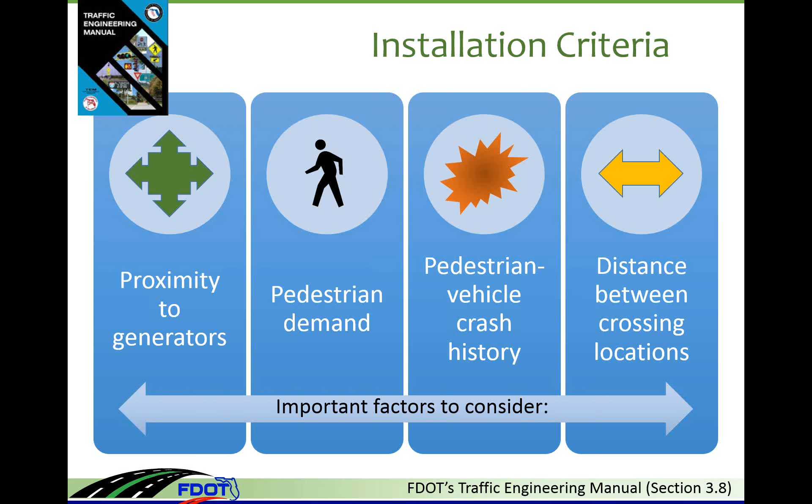The Traffic Engineering Manual also provides standards for the appropriate treatments for marked mid-block crossings. The determination of the appropriate treatment is generally based upon pedestrian volumes, vehicular volumes, distances to adjacent traffic signals, etc. The TEM outlines 3 primary treatment options for mid-block crossings beyond an appropriately signed and marked crosswalk. First, the traffic signal, a conventional full traffic signal installed at a mid-block location. Consideration for traffic signal warrant and spacing criteria must be addressed as part of this option.

The pedestrian hybrid beacon. This treatment is also referred to as a high-intensity activated crosswalk beacon, or HAWK beacon, H-A-W-K. This treatment provides for signalized, protected pedestrian crossings while minimizing disruption to vehicular flow. Pedestrian hybrid beacons must meet specific warrant criteria for installation as outlined in the TEM. This is a common option in locations where a full traffic signal is not warranted by pedestrian volumes, demand, or a more intense warning treatment.

And finally, supplemental beacons. The TEM provides two options for supplemental beacons. One, the flashing yellow warning beacons, and two, rectangular rapid flashing beacons. Conventional flashing yellow warning beacons installed as part of regulatory or warning signs provide additional emphasis on the crossing location. Note that the TEM requires that these beacons be activated by a pedestrian to increase the effectiveness of the treatment. RRFBs are also pedestrian actuated and quickly flash alternating warning lights in a wig-wag pattern.

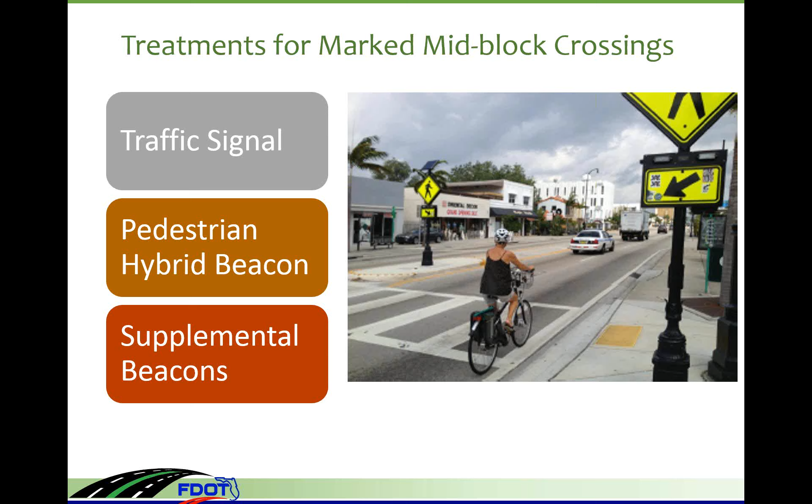And this, you haven't even seen this, but this came in really just minutes before the presentation, and I thought it would be important to talk about this. This is a flyer from the Florida Association of State Troopers, trying to answer the question: how do good drivers get killed on our highways? 42% of good drivers, those found not at fault, were killed in head-on collisions. One measure that you can take to reduce your risk as a driver is to use major highways where traffic flows are separated by medians. I think that's a pretty good endorsement of the work that we're doing.